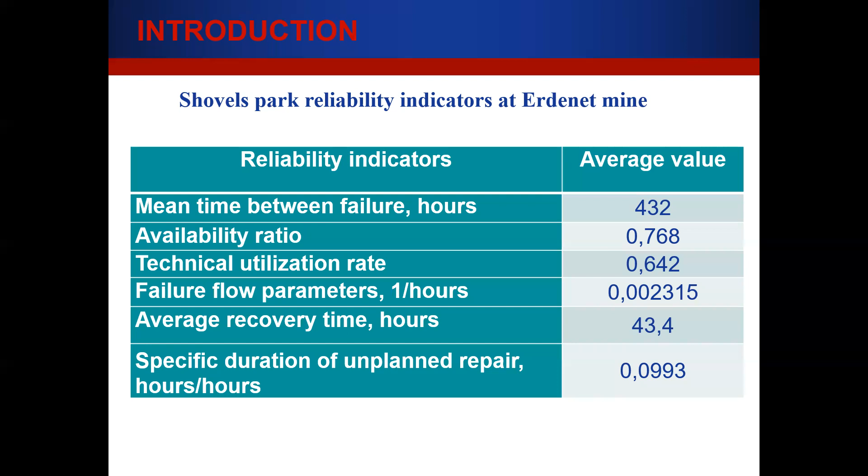In general, the operation and productivity of shovels, which are the main machines in the mining industry, on the one hand, depend on the weather condition, technical state, and technological activities. On the other hand, it directly affects the operation and downtime of other technological machines, such as dump trucks. Therefore, based on structured data, the costs for the downtime of the shovels are shown in the next slide.

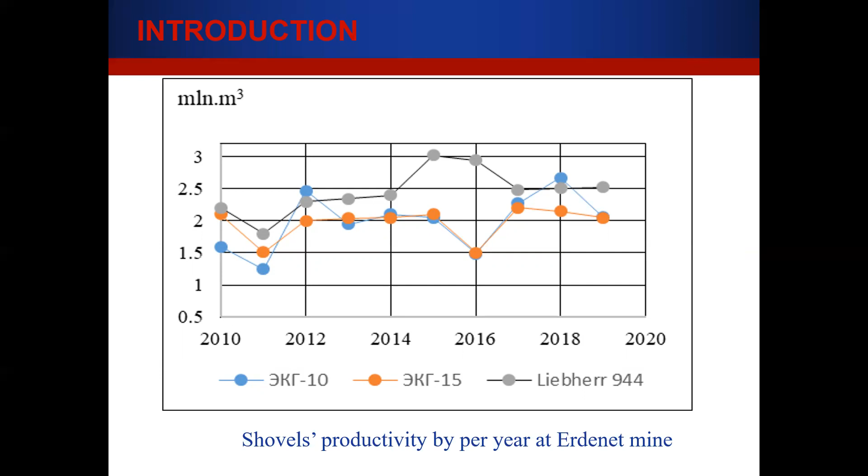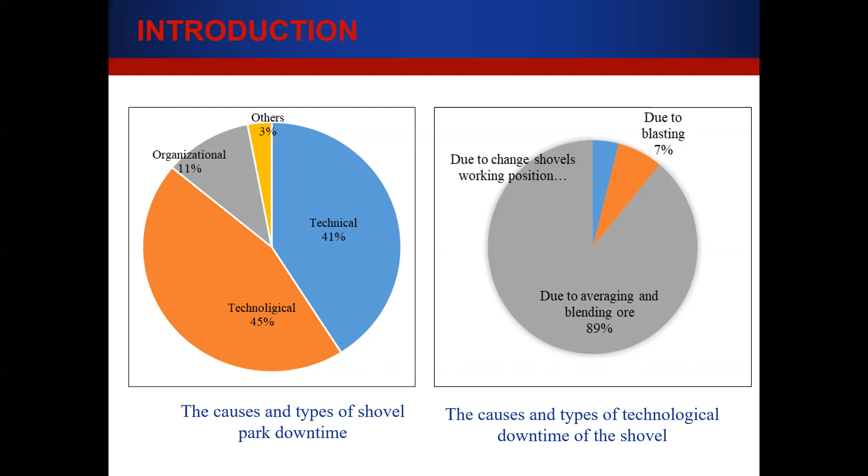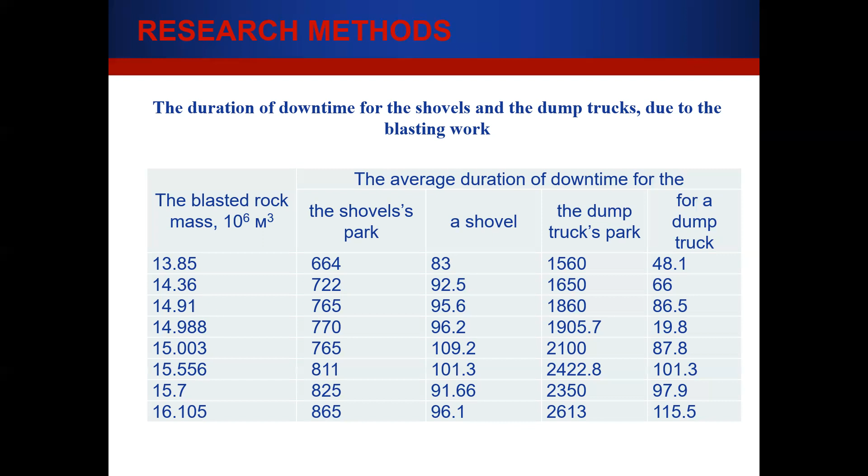A correlation between the duration of downtime for shovels and dump truck parks during the year and volume of the blasted rock in given year was established and analyzed using statistical software.

The number of blasting blocks will be determined by the volume of the rock mass to be excavated during the year. By reducing the number of blasting per year and optimizing them, it's possible to decrease the equipment downtime using that mine. As a result, this will allow them to improve their work to a certain level. Therefore, it's necessary to define the optimal number of blasting per year.

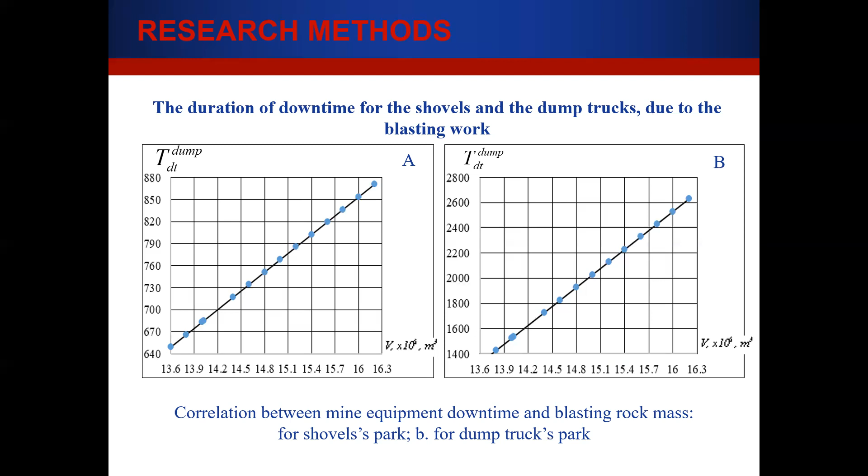The purpose of preparing the rock for excavation is to ensure the continuous operation of the shovel. Therefore, based on the theory of supply or resource allocation, let's determine the volume of one-time blasting by dynamic programming.

The purpose of resource allocation theory is to determine the optimal amount of product supply, average resource level, inter-supply time or supply rotation interval, depending on the level of consumer demand and supply.

In resource management theory, the following conditions are considered in several variants. These include, first, reserve intervals are different and amount of supply is constant. Second, backup rotation interval and reserve size are variable. Third, reserve turnover intervals are irregular and resource supply is unstable.

The basic condition for operating shovels and dump trucks uniformly throughout the year is to provide them with a constant supply of blasted rock at regular intervals. In our case, number of equipment available may be uneven during the supply period due to maintenance and repair. Therefore, it's appropriate to consider the volume of blasting mass between minimum and maximum.

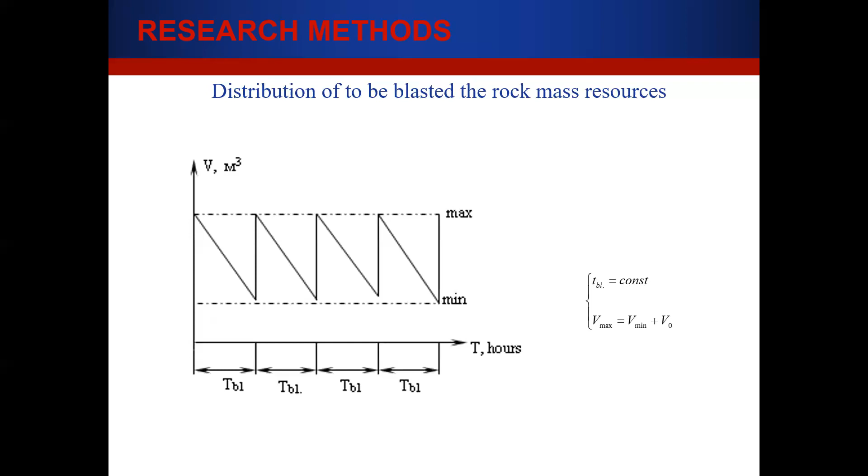The purpose of blasting is to distribute the blasting block n times a year in order to minimize equipment downtime. By reducing the number of blasting per year, it's possible to decrease downtime of equipment and to reduce the cost of productivity of equipment due to blasting work.

However, as this increases the size of one-time blasting, the cost of one-time blasting will increase, and the optimal number of blasting per year will be found at the minimum downtime of equipment and blasting costs.

Our task is one-dimensional because the blasting block for one-time resource distribution is one-time allocation, and resource allocation is a multi-step dynamic decision-making process. So we can model it by dynamic programming. First, we can change volume of rock mass into subsets of one-time blasting. Therefore, the cost of blasting can be given by the sum function as shown in the equation, and the volume of rock to be blasted per year expressed by formula.

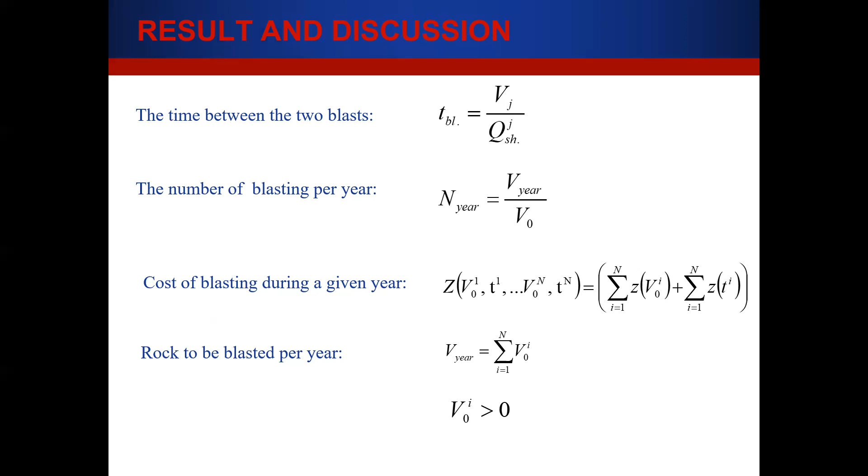Therefore, the task of optimizing the number of blasting per year is determined by the mathematical model as shown on the next slide. The model's goal is minimizing blasting costs. In the last, we have estimated the blasting number per year at about 42. In other words, the blasting number decreased from 53 to 42 at the present mine. It gave us a chance to reduce blasting costs by improving productivity of mining equipment.

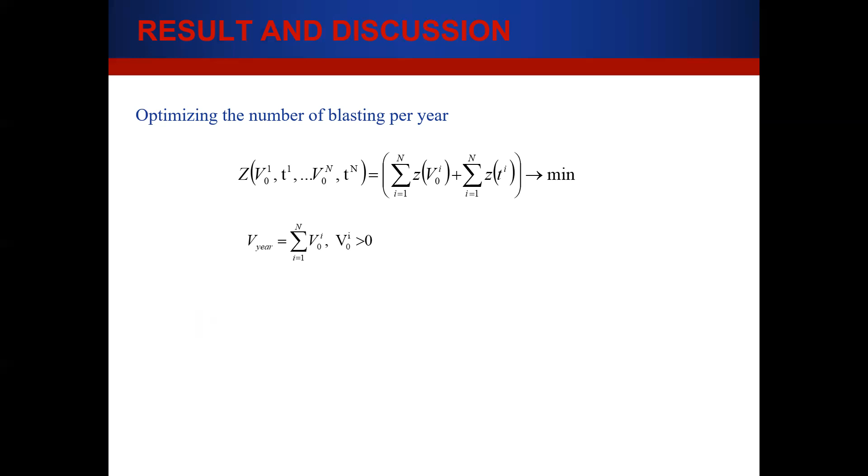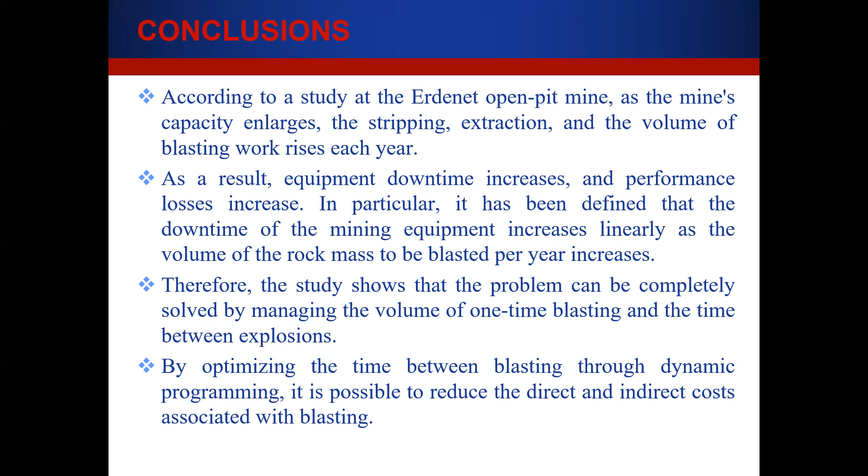Therefore, the study shows that the problem can be completely solved by managing the volume of one-time blasting and the time between explosions. By optimizing the time between blasting through dynamic programming, it's possible to reduce the direct and indirect costs associated with blasting. Thanks for your attention.